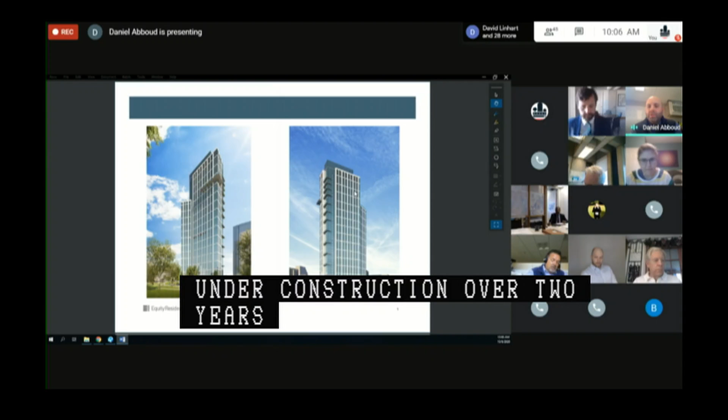This is a project that's been underway, under construction for over 2 years now, and on a 45-story residential building with 470 units over a 5-level parking garage with 769 resident and public parking spaces.

As we mentioned, we previously presented in front of the commission in July for new business, and we now have responses from and are coordinated with all city agencies. We're currently in the superstructure phase of the project, expecting to top out concrete just before Thanksgiving, and are getting a phased occupancy next summer. Work associated with these specific repairs will occur next spring and summer.

Just turn it over to Chris Hodney with Nitsch Engineering to talk more about the pedestrian easement. Thanks, Dan. Share my screen.

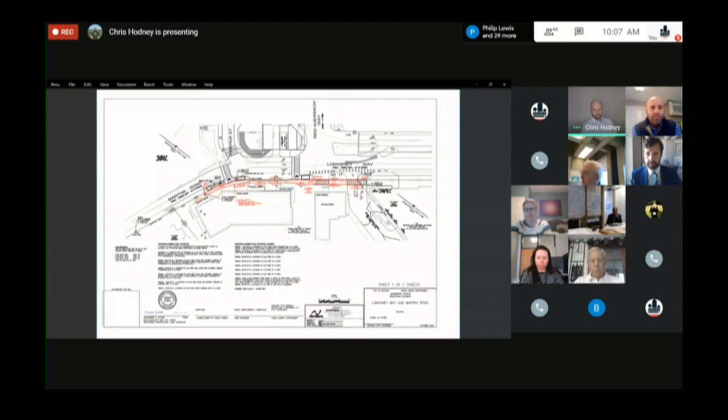All right, so can everyone see the pedestrian easement plan on my screen? We can. All right, great. So this is a pedestrian easement along Lomasney Way and Martha Road in front of the project. Basically, the existing sidewalk and the proposed sidewalk are on private property, and so this pedestrian easement is just to rectify that situation, give the public rights to move over the sidewalk in front of the building. It's approximately 2,482 square feet, and the width varies, from anywhere from 5 foot 9 inches up to about 14 feet - 5 foot 9 on Martha Road and 14 feet on this end by Lomasney Way.

And this is just in support of all the other specific repairs, which are the next item on the agenda. Thanks, Chris. Questions or comments on the pedestrian easement? Todd or Abby? We're all set on this. Members of the public? I don't see any. Okay.

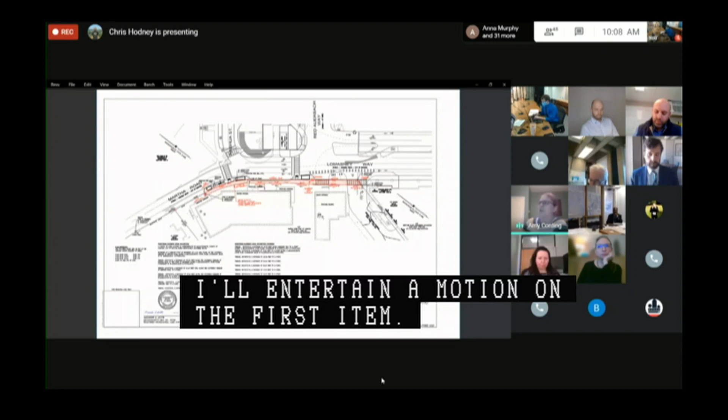I'll entertain a motion on the first item, the pedestrian easement. I'll make a motion on a petition of Charles River Park D Company for the acceptance of a pedestrian easement in Lomasney Way and Martha Road as read into the record by the chair. Second. All in favor? Aye. So moved.

Moving on to our second item on a petition by Charles River Park D Company for the making of specific repairs within the following public ways in Boston proper, consisting of curb realignment, roadway and sidewalk reconstruction, as well as new and relocated pedestrian ramps, specialty pavements, street lighting infrastructure, street trees, planters, landscaping, storm drain infrastructure, street furniture, bike racks, driveway curb cuts, and the removal of traffic islands. The locations are Lomasney Way, generally address number 35, southeast of Martha Road and Nashua Street, Martha Road on its southwesterly side, northwest of Lomasney Way and Nashua Street, Thoreau Path, generally north of William Cardinal O'Connell Way. This was new business on July 23rd, 2020.

Had its first public hearing on August 20th, 2020. Had a public hearing continued on September 3rd, 2020. Another public hearing continued on September 24th, 2020.

This is shown on two sets of plans entitled City of Boston Public Works Department, Engineering Division, Specific Repair Plan, Lomasney Way, Garden Garage, Lomasney Way Improvements, West End, 3 sheets dated June 12th, 2020, as well as City of Boston Public Works Department, Engineering Division, Specific Repairs Plan, Thoreau Path, West End, 2 sheets dated June 2020.

Daniel or Chris, are you presenting on the specific repair plan? I think Robbie. Sorry, oh, Robbie is. Oh, I'm sorry. Yeah, I just launched into it and was muted, so apologize.

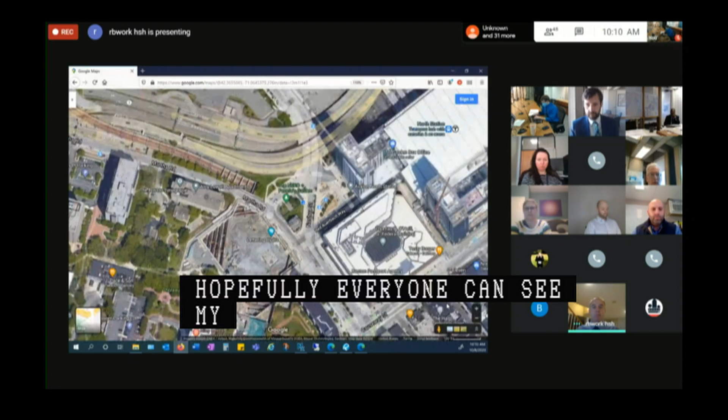Very good. Real quick for context, Charles River, Zakim Bridge over here, North Station, an earlier image of the project prior to foundation or excavation being completed. You can see Martha Road here, Nashua Street here, Nashua Street here, Lomasney Way, and the GSA building here.

I'll start the presentation around the intersection here, and I'll flip over to the specific repair plan now. So this is that point that I just showed on Martha Road in the aerial image, and I'll start in this area and go counterclockwise around the site.

This is our first garage entrance exit with the 700 plus space public private garage that Mr. Abboud referenced. Continuing around the front of the site here, we've got street trees, bicycle racks, benches, street lights, curb ramps, etc. Typical street furnishing.

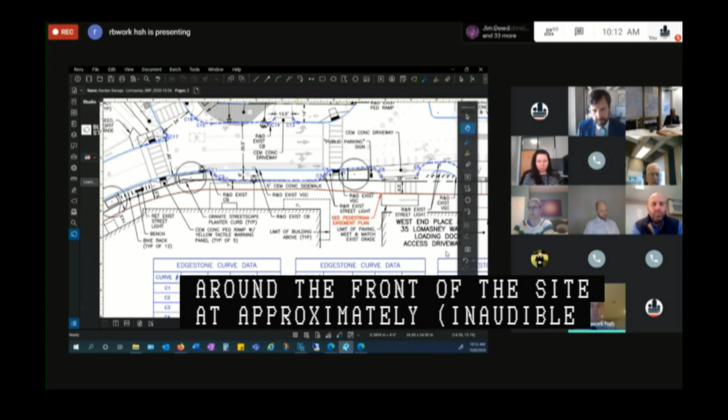And then as we come around the front of the site, we've got approximately 80 feet of pickup drop off here at the front door of the site here, new curb ramps and a new crossing in this area here, as well as new lane markings and a bicycle lane at the intersection.

Continuing towards Causeway Street, we have additional plantings, curb ramps. Our second driveway into the garage.

In this area here, we have extended sidewalks to an unused pavement area and converted into sidewalk space. And we have a modification to the existing access for deliveries to the building and underground parking for the West End place.

Continuing into the intersection, there is an existing asphalt median here that will be removed to create a left turn lane that will separate left turning vehicles into the loading area, as well as the parking garage, from vehicles trying to go through and right.

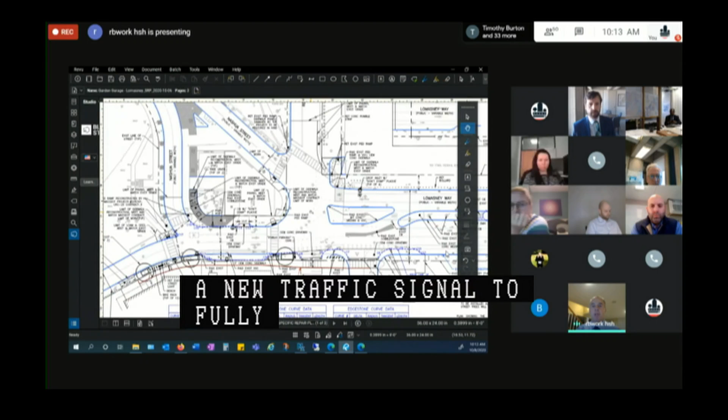Along with this, we will be proposing a new traffic signal at this intersection to fully signalize, organize the vehicle movements, protect pedestrian movements, and facilitate access and egress from the garage.

Earlier meetings with the commission and with various agencies, we had a strain pole and span wire design, and that was changed to a mast arm design. That change was coordinated with BTD Signals Department.

Continuing around the corner of the GSA building, we are closing this existing crossing here that exists today, and we'll be infilling the wheelchair ramp. The crossing is now on this side, which is a bit more attractive and a bit less of a continuous pavement width here.

We are proposing to redo this ramp here and this ramp here. We are proposing not to touch this constructed ramp in this area here that was built as part of the Avalon project a couple of years ago, I believe.

Our limit of work on Nashua Street is this area here. We'll loop around and then meet our other limit of work on the other side here and finish in front of 32 Lomasney Way, this existing building here.

We will be removing the existing cobbles that are here and replacing them with cement concrete sidewalk. We will be replacing existing missing tree grates in this area, which is a coordinated effort with the MassDOT project in this area that has reconstructed some of the wheelchair ramps.

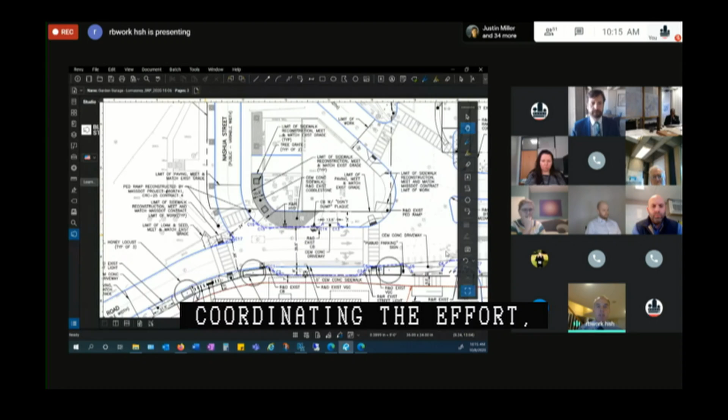We've obtained their design file. We have matched our design to theirs so that ideally we'll have a seamless construction of two projects.

I just want to make sure I didn't miss anything. So the specific repair plan is accompanied by planting details and our hardscape landscape details, so pretty standard. The MassDOT project gave us a detail for their tree grate that they're using so that we will match that precisely. So that is the balance of the specific repair plan in front of the project here.

I'll turn it back over to Sadni and Mitch, who will describe the specific repair plans on behind the project associated with the Thoreau path. And then Mr. Hodney's complete report now, it's up to the commission, we can entertain questions. Any questions by members of the commission on the sections that Robbie just presented before we get to the other portion?

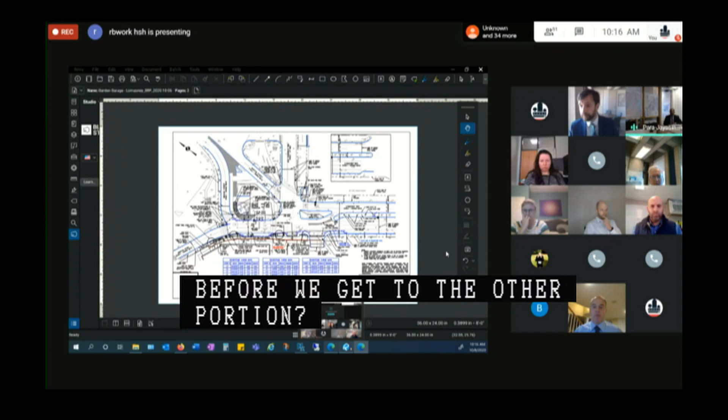Yep. Probably have all BTD comments—has Sven Marson addressed all the BTD comments that have been sent forth to you, to the extent that?

There are some outstanding comments related to pavement markings and signage. The balance are all pavement markings and signage related. We received those a little bit late in the process. We're happy to incorporate them, reviewed them. They're not impactful to the project or to the elements that are part of PIC review and approval. We're asking that we can be approved, assuming we resolve those comments from Mr. Monticelli that are outstanding.

So to be absolutely clear, you are of the opinion that all the comments that still require minor adjustments are not in themselves impacting the PIC plans being shown and recorded right now. Is that correct? That is correct.

Mr. Monticelli asked that we include a standard detail for a bicycle rack on the PIC plans, which is not shown currently. So that would be in addition to what you're seeing today—it would be BTD's standard detail for a lollipop bicycle rack.

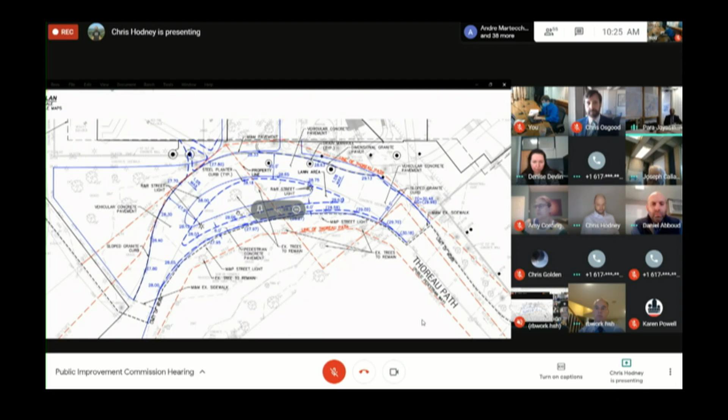Yes, my understanding is that this area is included in the LMI, and I think Dan or Johanna could confirm that. Can someone please confirm that? Because Chief, over the years, there has been much debate as to who is responsible for the maintenance of Thoreau Path, and it has ping-ponged into negotiation. So it will be good for us to know who is responsible for the maintenance of the reconfigured island.

Correct, and we're working through that with Mr. Liu now with the LMI. So we understand there's some shared responsibility there, and the work we're doing is kind of taking precedent. Awesome, Daniel. We truly appreciate if you could execute that maintenance agreement, which will allow us to finalize these plans with the registry. Okay? Thank you, thank you.

Other questions or comments? Todd or Robbie? I think we're all set on this. All right, members of the public? I see none. All right, I'll entertain a motion on this item then.

I make a motion to approve a petition by Charles River Park D Company for specific repairs in the area of Lomasney Way, Martha Road, and Thoreau Path, more particularly read into the record by the chair. Second. All in favor? Aye. Aye. So moved. Thank you. Thank you so much. Thank you very much, Commissioner.

Yes, thank you. Moving on to our third item, a petition by Arlington Boylston Realty Trust for the making of specific repairs in the following public ways in Boston proper, consisting of curb and sidewalk reconstruction, as well as new and relocated pedestrian ramps, specialty pavement, streetlights, street trees, planters, irrigation infrastructure, groundwater recharge infrastructure, bollards, and driveway curb cuts.

So we were here for new business about a month ago when we continued the public hearing 2 weeks ago. This is for the renovations to 350 Boylston Street. In the past 2 weeks, we had a very productive conversation with Boston Public Works regarding the sidewalk design, and I believe at this point we have a design that is compliant with the Boylston Street standards. So I think we're good to go. If you allow me, I'll walk through the drawings.

We're going to replace about 240 feet of sidewalk in front of the 350 Boylston Street building. The sidewalk will be 9.5 feet wide of poured concrete, and then we have a 5-foot wide pervious paver zone. We do have 2 new street trees that will have a street collar around them, so there will be no tree grates, but the pavers will work their way right up to the tree collar around the tree. We also indicate 2 removable round planters near the entrance. When we submit the Mylars, those will either be placed in the pervious paver zone or removed from the drawing entirely. But just so everyone is aware, these are not a permanent condition, they're a temporary condition.

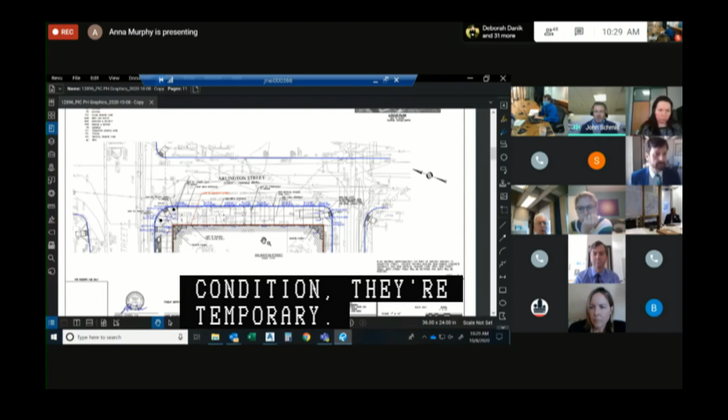On Arlington Street, we have a concrete sidewalk that's 14.9 feet wide. We're constructing new wheelchair ramps on our corner as well as the opposite corners. And if we proceed to Providence Street, we are replacing about 240 feet of concrete sidewalk, and this is where the injection wells will be going. Along Providence Street, we have two entrances - one is for garage and one is for loading docks - and there is a large landing island between the 2 driveways for safe pedestrian egress.

So I'm happy to entertain questions regarding specific repairs, and then we can talk about the recharge wells if you'd like.

Any questions or comments on the specific repairs John just walked through? I appreciate, Barbara, John, everyone's coordination around a design standard for Boylston Street. Thank you for that. Now, do you want to go on to the recharge wells, and then we can see if there's other questions? Thank you.

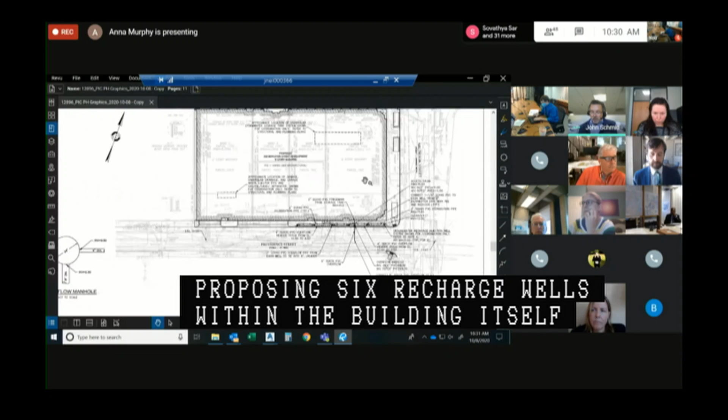So on Providence Street, we are proposing 6 recharge wells. Within the building itself, we will have a storage tank that will capture the required stormwater requirement, meets the stormwater requirement, and then the water will be pumped into these injection wells, and there is an overflow from that into the city's dedicated storm drain.

Thank you so much, John. Questions or comments on the recharge wells or other elements of the specific repair plan?

Oh, hi, John. I was curious where we were on the site plan approval for the groundwater recharge. Yeah, thank you, Denise. We received comments from your office a couple of weeks ago, and we have been pushing staff-wise to revise these plans for today's hearing, and resubmitting the BWSC drawings is on our list for next week. So those drawings will be incorporated into a final submission that will be made to Boston Water and Sewer next week. Okay, great. Thank you, John. Yep.

Other questions or comments on this? Todd, Robbie? We're all set. All right. Any members of the public?

Meg Manzer-Cohen from the Back Bay Association. Good morning, Meg Manzer-Cohen with the Back Bay Association. I just wanted to weigh in support of this project and thank all of you for all the work you've been doing on this, especially my friend Cara, who's been working on Boylston Street with me for so many years. Thanks for everything that you're doing. We're very much looking forward to this project moving forward, and these improvements will be fantastic for pedestrians on a go-forward basis. Thank you so much, Meg. Other questions or comments from members of the public?

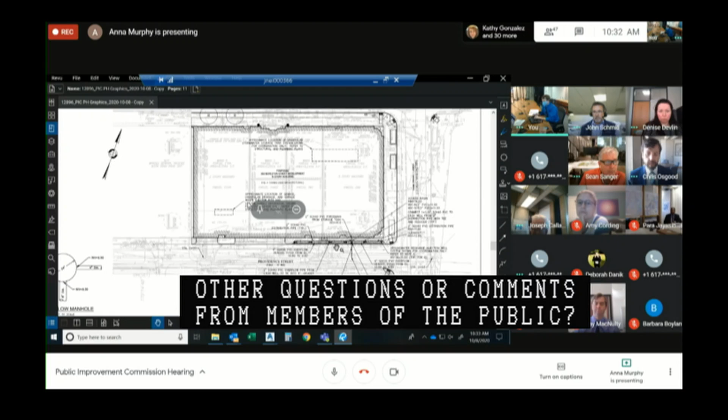I do not see anyone else. John, anything else you want to cover on specific repairs? That covers the specific repairs.

Thank you. All right, I'll entertain a motion on this item. I'll make a motion on a petition by Arlington Boylston Realty Trust for the making of specific repairs in Boylston Street, Arlington Street, and Providence Street as read into the record by the chair. Second.

All in favor? Aye. So moved. Our next item is on a petition by Arlington Boylston Realty Trust for the granting of a projection license for the installation of canopies and awnings over portions of the sidewalks within the following public ways in Boston proper. The locations of Boylston Street on its southerly side at address number 350 west of Arlington Street, and Arlington Street on its westerly side between Boylston Street and Providence Street on its northerly side west of Arlington Street.

This was new business on September 3rd, 2020, had its first public hearing on September 24th, 2020, and this is shown on a set of plans entitled City of Boston Public Works Department, Engineering Division, Canopy License Plan, 350 Boylston Street, Back Bay, 3 sheets dated October 2020.

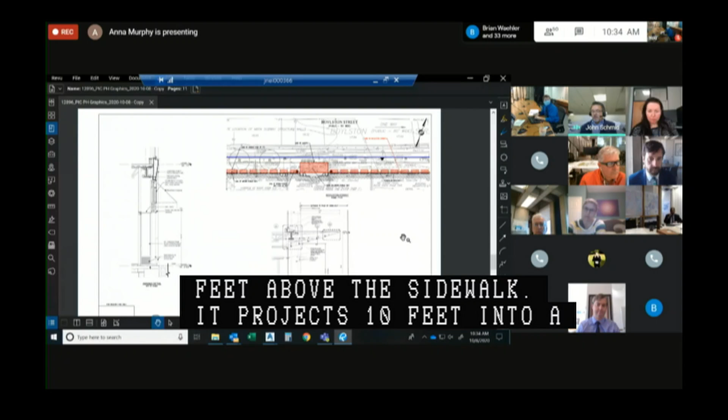Good morning, Commissioners. John Schmid with Nitsch Engineering. Along Boylston Street, we have one large steel and glass canopy that will project at the curb line or near the curb line 16.5 feet above the sidewalk, and at the building 13 and a half feet above the sidewalk. It projects 10 feet into a 15-foot wide sidewalk, so we're under the 65% rule, and it will be internally drained and heat traced.

Then we also have 17 retractable awnings. The first awning on the left side of the drawing is our largest awning, and that is 28 square feet. The remaining 16 awnings are all 20 square feet, and they project 2.9 feet into the sidewalk, again which is 15 feet wide, and they are 10 feet above the sidewalk.

As we turn to Arlington Street, we have the same 20 square foot awnings. We have 10 awnings along Arlington Street, and they project 2.9 feet into a very wide sidewalk, into a 15-foot wide sidewalk, and then they are 10 feet above the sidewalk.

And as we turn to Providence Street, we have the largest canopy, a metal canopy at the most significant entrance along Providence Street. It is 10 feet 9 inches above the sidewalk, and it projects 4.3 feet into a 7.1 foot wide sidewalk, so we're at 60% projection into the public way. It is heat traced and internally drained.

We also have 3 canopies along Providence Street that are similar to the canopies on the other streets, 20 square feet, 10 feet above the sidewalk, 2.9 feet projection into the public way. And that's my presentation. John, thank you for that overview. Questions or comments on the projection licenses?

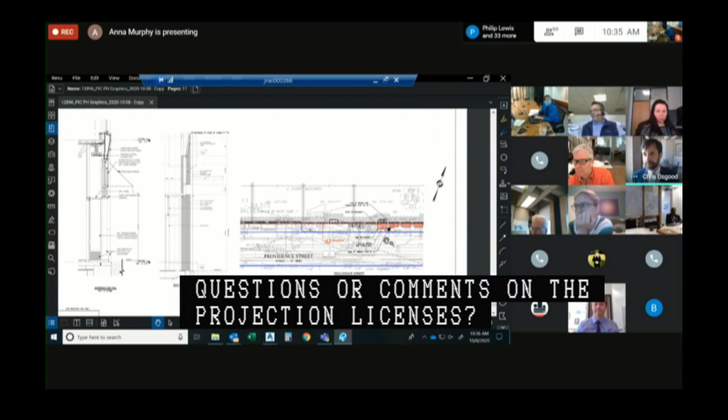Todd, Robbie? Any members of the public? All set. No public. Okay, and just as a reminder, for members of the public who are interested in testifying, feel free to do so either by putting your name in the chat or, if you're visible on the screen, raising your hand.

With that, we'll entertain a motion on this item. I make a motion to approve a petition by Arlington Boylston Realty Trust for a projection license on Boylston Street, Arlington Street, and Providence Street, as more particularly read into the record by the chair. Second. All in favor? Aye. So moved. Thank you, and stay safe, everyone.

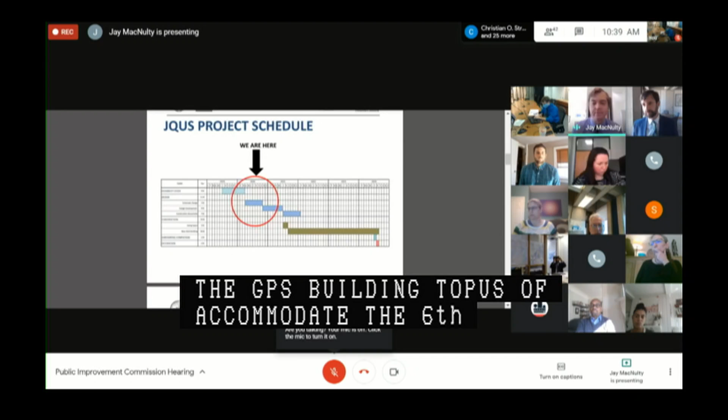Just an overview of where we are with the project schedule. The project team and the School Building Authority have recently submitted the schematic design for review and approval. We expect to begin construction on the JQUS project next summer at the conclusion of this current school year, constructing space in the existing Arlington campus of the JQUS building to accommodate the 6th and 7th graders currently located in concrete modulars on the current project site. We expect the project to continue construction from there and to be ready for operations for BPS by the beginning of the 2024-2025 school year.

So just a quick schedule detail of where we are. As I mentioned, we are working with the MSBA, the Mass School Building Authority, for the project. The MSBA has various different modules that they have us go through. At this time, we have just entered Module 6, which is detailed design or design development.

Some of the activities we're going to be performing during this phase of the project include selection of a CM at risk, putting together a design package for swing space, further development of the design of not only the building but also the streetscape, cost estimating and scheduling. We're also expecting to be held for a vote for approval of a project funding agreement at the Mass School Building Authority board meeting later this month on October 28th.

So at this time, this project currently is estimated to be a $193 million project, and the city is estimating that we will be receiving in the neighborhood of $54 million in reimbursement towards the cost of the project.

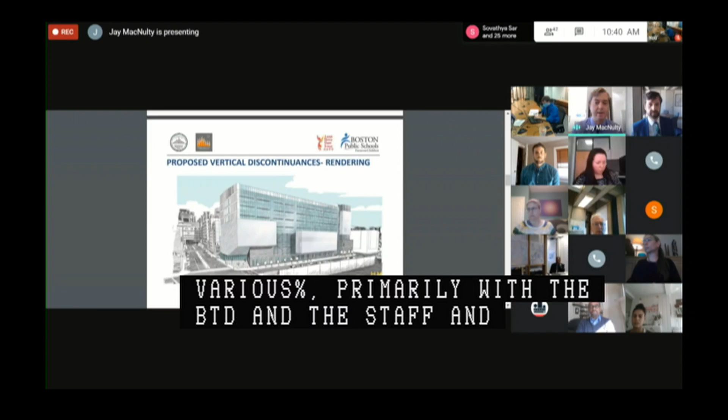So we've been working over the past 6 months or so with various representatives from other city departments, primarily with the BTD representatives. We've had several meetings with Amy Cording and her staff, as well as with William Moose. We also met with the Boston Water and Sewer Commission, Denise Devlin, to talk about our vertical discontinuances. We'll be continuing to work with the various city departments as the project continues along design. But we find ourselves in a position here where we need to request approval from the PIC to approve vertical discontinuances in order to establish ownership and control of the site so that we can execute the project funding agreement with the Mass School Building Authority.

So here we have a rendering of the new building. In front of you, you see the Mass Turnpike as well as Marginal Road. On the left side is Washington Street, and on the right side is Harrison Avenue. In the elevations, you'll see on the west side is the auditorium for the JQUS. On the right side, the projection over the sidewalk is the gymnasium, and above that are 4 stories or 4 floors of classrooms facing south, which will require sun shading. Because this is a relatively small, trapezoidal shaped site, it's very tight, 0 lot line construction. The educational program, working with BPS and others, required for the new JQUS school, requires these overhangs over the sidewalk.

So the next slide is a site plan. Pip, are you able to speak to the site plan, or Josh? Philip, you're on mute. Yes, can people hear me?

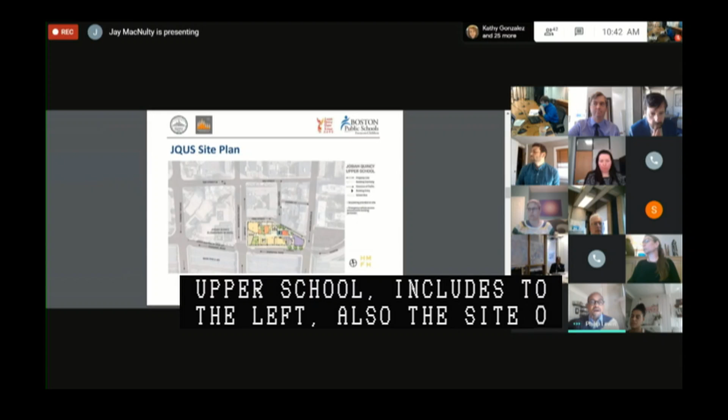Yes. Okay, so this is the site plan of the proposed Quincy Upper School. It includes, to the left, also the site of the Quincy Elementary School, because the 2 schools are associated. You can see that the building fills out the entire site with just a few small exceptions. You can see the unusual trapezoidal shape of the site, as it's bound by Marginal Road and the Turnpike on the south, by Washington Street on the west, and Harrison Avenue on the east. The trapezoidal shape comes from a small street called Pine Street, which goes along the north side of the site.

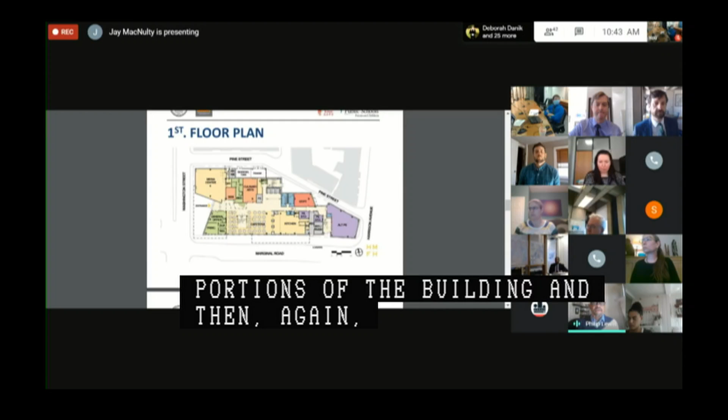There's a few areas on Pine Street because we're very close to adjacent residential buildings. So we're doing what we can to pull some of the mass of the building away from the Pine Street residences and provide a little bit of green space relief, because this new building will be much larger than those residential buildings are at the moment.

When you enter the building off of Washington Street, you enter a lobby space cafeteria that leads you to a major stairway that takes you upstairs to the second floor, where the auditorium and the gymnasium are. These are the two big public spaces for the school. Those are the two spaces that really just fitting the program that was required, us to project out into the street. So it's the second floor projections that we're talking about.

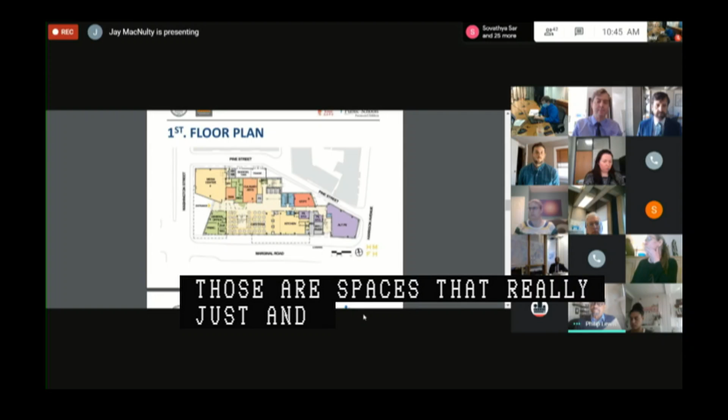One other item I would mention is that at our new business hearing two weeks ago, PIC asked us to clarify our intention with regard to resurfacing the adjacent streets. So just wanted to circle back to everyone on that and let you know that the project's intention is to mill and overlay Pine Street, to reconstruct Marginal Road, and also to mill and overlay the utility entrance locations for the building on Washington and Harrison Avenue. Thank you so much, truly appreciate that.

Second floor, Phil, you want to take this? Yep, this is the second floor plan. This is an important community space for the project. It will become an important building in the Chinatown and South End areas.

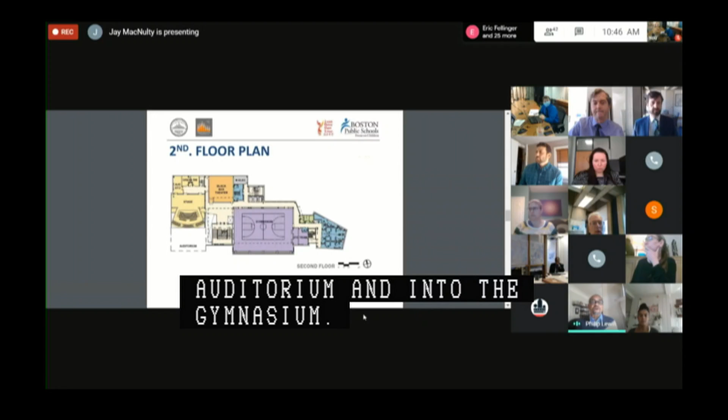Here you can see this major stairway that can lead the public up to the second floor and into the auditorium and into the gymnasium. There's also a small black box theater. You can see perhaps that we're really squeezing to get the gymnasium in, but it doesn't fit within the bounds of the building, so it's projecting about 16 feet into the Marginal Road right of way.

Excellent, yep, and that's a good segue, I think, into the site plan. Josh, you want to run through the next couple of slides? Since vertical discontinuance is the next item on the agenda, can we hit specific repairs first, and then we'll do vertical? Absolutely, yep, sure, sure. Rowan, if you actually want to allow me to share my screen, I can kind of get in a little closer with the specific repairs plan. Okay, no problem, sure.

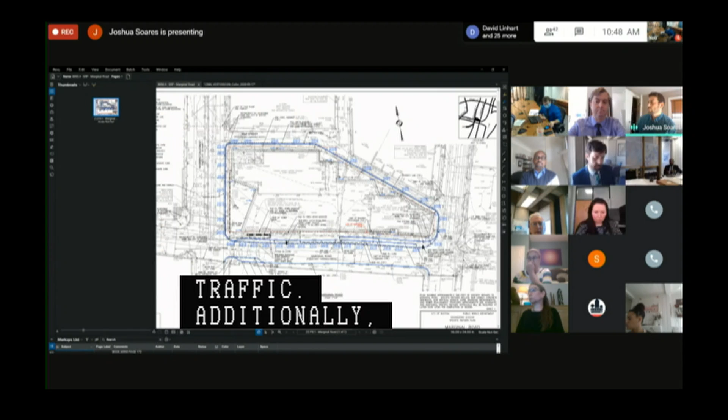Additionally, we have worked with Denise at Boston Water and Sewer to realign the sewer. There were concerns that as we develop the plans further, because as Ron stated, we're kind of in the schematic design phase of the project right now, there would be concerns that ultimately any foundations might impact the existing sanitary sewer here, which consists of a 24-inch sewer main. So as part of the specific repairs plan put forward now, we're going to go ahead and realign the sewer.

Additionally, in response to coordination with Boston Water and Sewer, obviously with the curb realignment and narrowing of Marginal Road, there's the potential to impact the current drainage patterns. Fortunately, there aren't any major impacts, and in setting the bottom curb elevation based on the existing pavement grades, we maintain the existing pattern, and simply we can just provide new drainage inlets over top the existing drainage structures. So there's one here, and then a second structure that would have to be installed over the existing drainage line on the east end of Marginal Road.

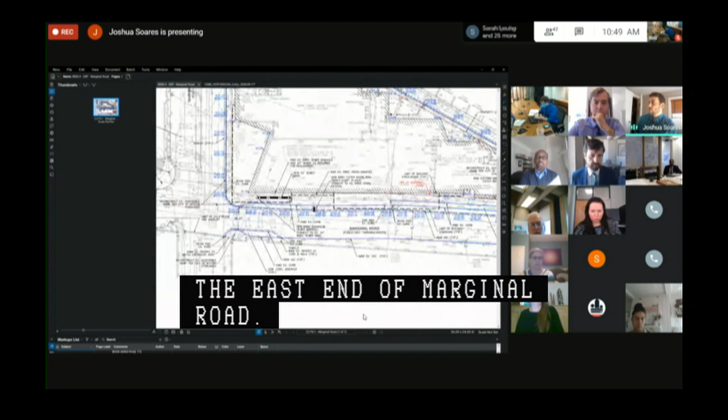Regarding the actual curb realignment, we are proposing to improve the condition at the intersection of Marginal Road and Washington Street with the expansion of the bump out here to allow for a safer and easier pedestrian walking path through here. It gets pretty tight against the retaining wall and around the traffic signals and street lights, so we will be increasing that width.

This reflects the worst case scenario with the proposed realignment. We've had further discussions about narrowing Marginal Road to, I believe, 28 feet, which would increase the separation between the projection and the face of the curb an additional 7 feet, putting it near compliance with the two-thirds width rule.

As Rowan stated, the Facilities Department in Boston Public Schools is committed to improving the surrounding streetscapes, as shown here with the new mill and overlay of Washington Street, Pine Street, portions of Harrison Ave, and Marginal Road. As we further move through the design, we will provide additional streetscape improvements: permeable paver strips, street trees, and additional furnishings.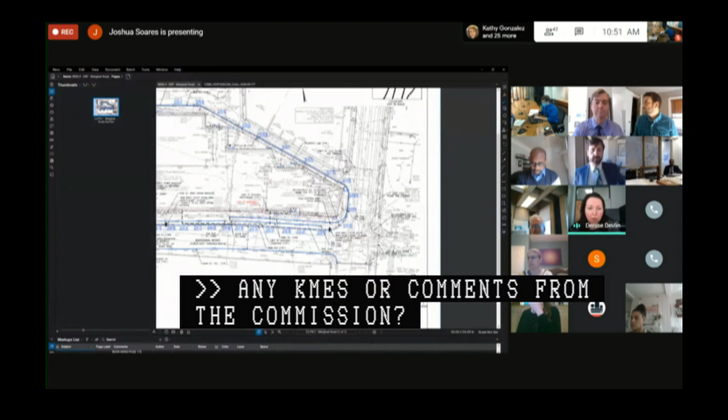On Pine Street, is Pine Street a public way or a private way? Private. Okay. The information that we have shows it as a public way, so we wanted to clarify that. When submitting the final set of plans, we request that you show the limits of the private way versus the public way, just so we can have clarification on that. That would be great. We'll look into that further. Okay, great, thank you.

Are you planning on doing anything on that side on Pine Street through the site plan process at this time? At the moment, and again we're early in the design process, but the intent is to provide an underslab groundwater recharge system, which will ultimately overflow to the Boston Water and Sewer main in Pine Street here. I thought that was public in the street book.

Pine Street is a public way between Harrison Ave and Washington Street. Okay, yep, we'll revise the plans and look into that discrepancy there. Thank you.

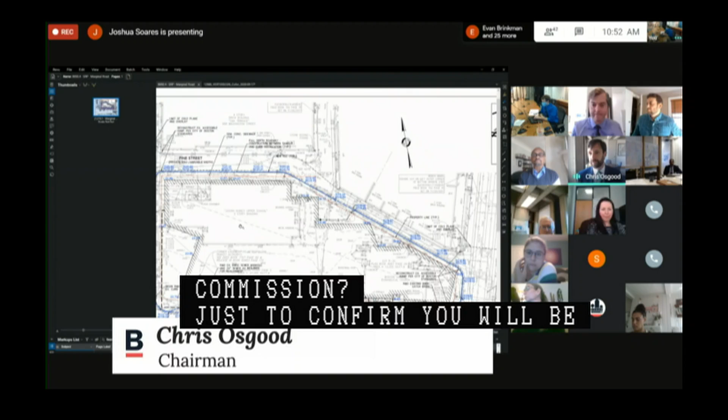Other questions or comments from the commission on this specific repair plan? Just to confirm, you guys will be back with another repair plan specific to the streetscape design, which will account for, in particular, the potential proximity of the overhang to the curb line. Yes, absolutely. This timing is a little bit unusual in the sense that the MSBA requires us to have this process complete at this point in time.

So yes, understand the broader timeline that you guys are working on, I appreciate it. Great, and that's noted on the specific repairs plan that we fully intend to come back to the commission at a later date with the full intended design. Right, the new specific repairs. Yep.

Todd or Rob, any questions or comments on this repair plan? No, we're all set on this. Members of the public? None.

All right, I'll entertain a motion on the specific repair plan. I'll make a motion on a petition by the City of Boston Public Facilities Department for the making of specific repairs within Marginal Road as read into the record by the chair. Second. All in favor? Aye. Aye. So moved.

Our next item is on a petition by the City of Boston Public Facilities Department for the vertical discontinuance of portions of Marginal Road, a public way in Boston proper, located at the side of 900 Washington Street between Harrison Avenue and Washington Street, vertically above the grade of the sidewalk. This was new business on September 24th, 2020, shown on a set of plans entitled City of Boston Public Works Department, Engineering Division, Vertical Discontinuance, Marginal Road, 900 Washington Street and 249 Harrison Avenue, Boston proper, 2 sheets dated September 2020.

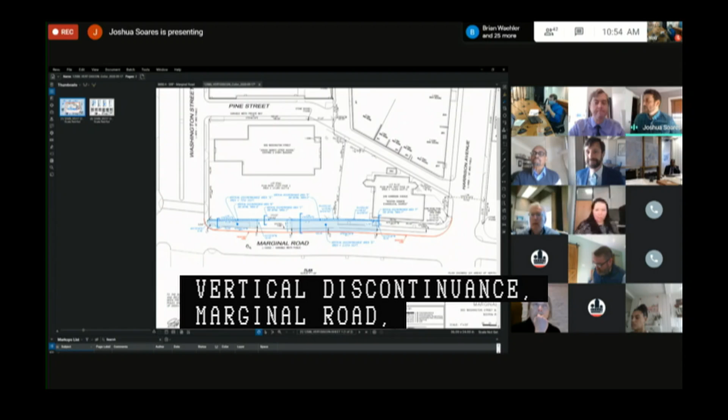Good morning everyone, Josh Soares is still here. I'll get right into the vertical discontinuance that was just previously discussed. The two main areas include the vertical discontinuance associated with the auditorium, and then the larger area associated with the gymnasium. Along the full southern face of the building will include the sunshades due to the southern exposure.

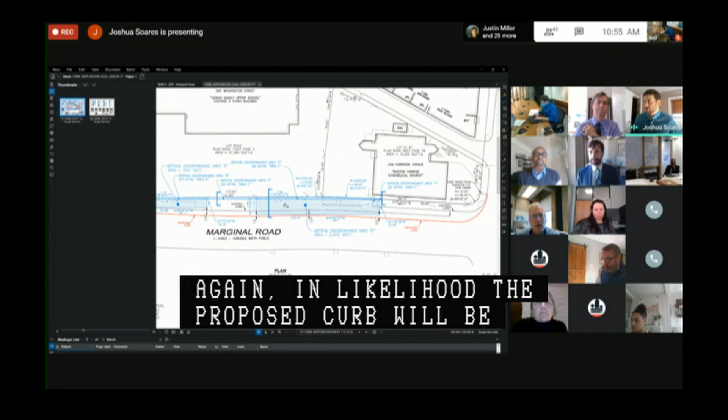Vertical discontinuance area A with the auditorium extends approximately 10 feet into the right-of-way, leaving approximately 7.8 feet between the face of that and the proposed edge of the curb. The larger discontinuance area associated with the gymnasium extends approximately 17 feet into the right-of-way, leaving as little as approximately 0.6 feet between the edge of that and the base of the curb. Again, it's to be noted that this proposed curb will likely be further realigned to narrow Marginal Road and provide that additional 7 feet of clearance between the edge of the overhang and the face of the curb.

The vertical discontinuance area A is approximately 22 feet above the finished grade and is approximately 23 feet high, whereas the gymnasium overhang is approximately 17 feet above grade and 26 feet high. You can see these in cross-sectional view on the following sheet.

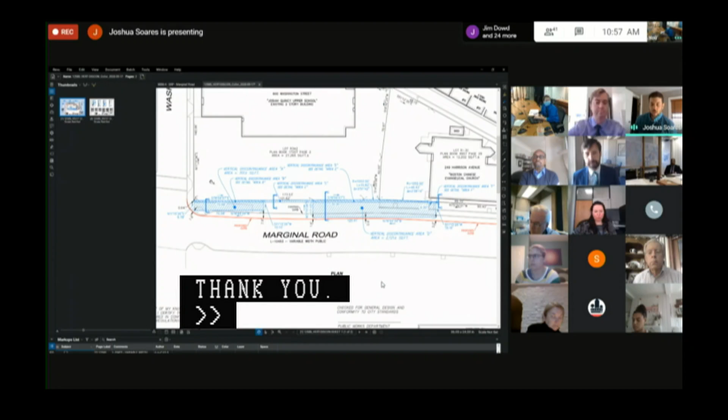Okay, thank you John. To reiterate, Chief Osgood, the auditorium will be approximately 22 feet above the grade of the sidewalk, and the gymnasium will be about 17 feet above the finished grade. I apologize, thank you for that clarification.

Absolutely exciting project. Public Works, and not just Public Works, all the city departments, we will do all that we need to do to help you achieve the end goal here, including any interactions which you may have or need to have with utility companies to support your project when you need it to be supported. Our PIC staff and my team can help you in that outreach if such outreach is needed.

So much appreciated. Yes, and I would also say that Todd and Amy and others at BTD have been extremely helpful thus far on the project. So thank you very much for that. You have our support.

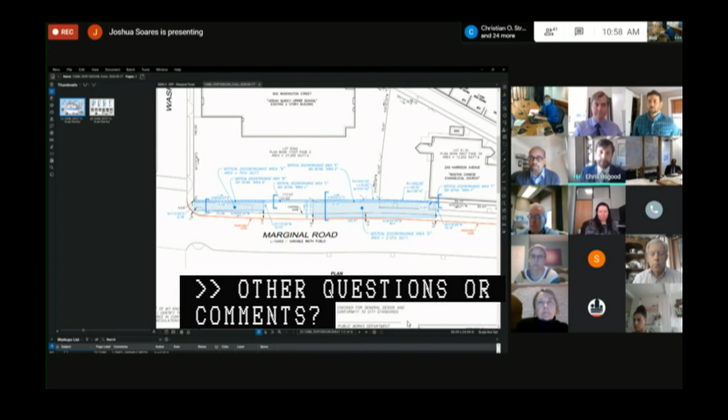Other questions or comments? Todd or Rob? I think we're all set with this. All right, members of the public? I see none. Okay, I'll entertain a motion on this item.

I'll make a motion to approve a petition by the City of Boston Public Facilities Department for the vertical discontinuance of portions of Marginal Road, as more particularly read into the record by the chair. Second. All in favor? Aye. Aye. So moved. Thank you guys so much. Thank you, great project. Thank you. We look forward to continuing to work with you.

Thank you. Our next item is on a petition by One Channel Center Ground Lease Lessee LLC for the making of specific repairs within Medallion Avenue, a public way in South Boston, located at the side of 1 Iron Street between Richards Street and Iron Street, consisting of new emergency flood barrier infrastructure. This was new business on September 24th, 2020. This is shown on a set of plans entitled City of Boston Public Works Department, Engineering Division, Specific Repair Plan, 1 Iron Street, Temporary Flood Barriers, Boston, 2 sheets dated July 2020.

Thank you and good morning, Commission. My name is Justin Miller with Tishman Speyer.

Justin, before you start, can I just ask, do you see the PowerPoint? I don't think it's up yet. We don't, not yet. Can I share here? Please do. It's not letting me, huh. This is Andre Martechini. Yep. Todd, can you see if, I don't know, is the present now feature showing for you?

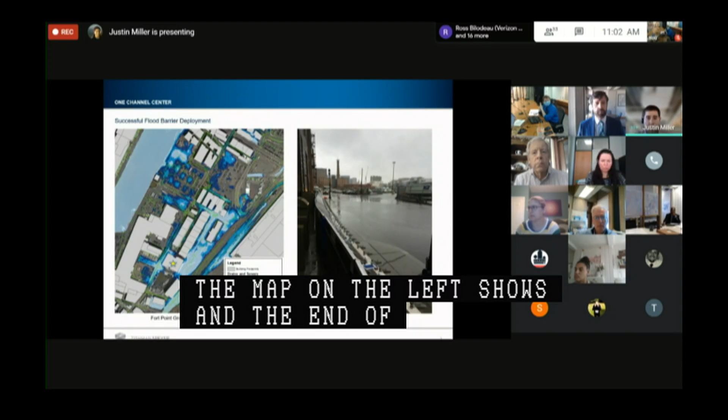To paint a picture, One Channel Center is located down the A Street corridor towards the southern end of the Channel Center Association near the West Broadway Red Line stop in the Seaport of Boston. It happens to be located in a particular area of the Seaport that is particularly susceptible to rising water and potential flood damage, as the map on the left shows. So when we purchased the property at the end of 2015, we also purchased and installed a deployable flood barrier system to protect against instances of raised water levels due to storm surges. On the right, you can see an example of that from March 2018 when there was a successful deployment.

Unfortunately, this particular system we deployed does not correspond with the 4-foot clearance along the sidewalk required by the city's Disabilities Commission. So we have since been working with Todd, Amy, and Sarah from the PIC and Disabilities Commission respectively to plan the procurement of a different flood barrier system that corresponds with that guideline.

Our colleagues at Kleinfelder have helped source an alternative system, which we've since presented, that can wrap around our loading dock gates and hardscape planters along that sidewalk to respect the 4-foot guideline and still provide the amount of protection we need to prevent water from getting into our loading dock and damaging the infrastructure of the building. So with that background stated, I'll now hand it over to Andre to go through the actual plan for the anchors in the flood barrier system.

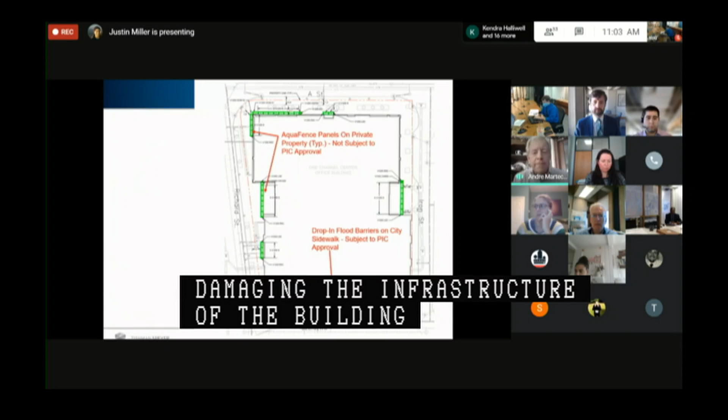Great, thank you Justin. Again, Andre Martechini from Kleinfelder. The subject of this public hearing is actually the drop-in flood barrier system down along the bottom of this drawing along Medallion Avenue. The green barriers up on the upper part of the drawing are the Aquafence panels that were previously purchased, and they are all situated on private property — we do not impact, we have sufficient room for people to pass by there. So the subject of this is the Medallion Avenue drop-in panel system.

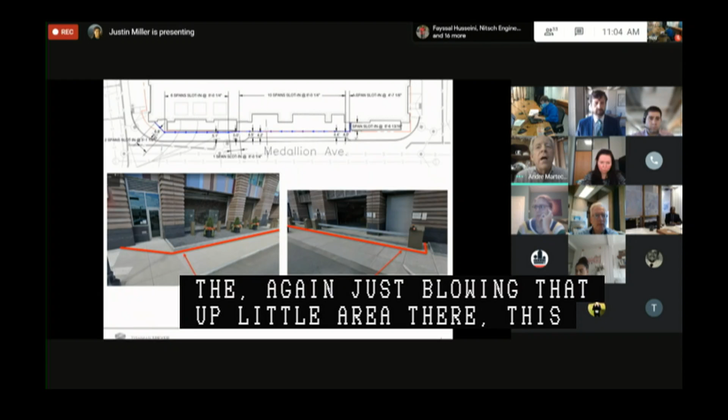So just blowing up that little area there — this is a panel system that's very narrow, and basically it'll be hugging there's a little planter along the sidewalk, and some of the little barriers that stop the loading dock area, so it'll be just hugging there. The minimum clearance we maintain is at least 4 feet from any object, so that's achieving the aim of this. It is a deployable system, so the picture on the left is an example of what it will look like.

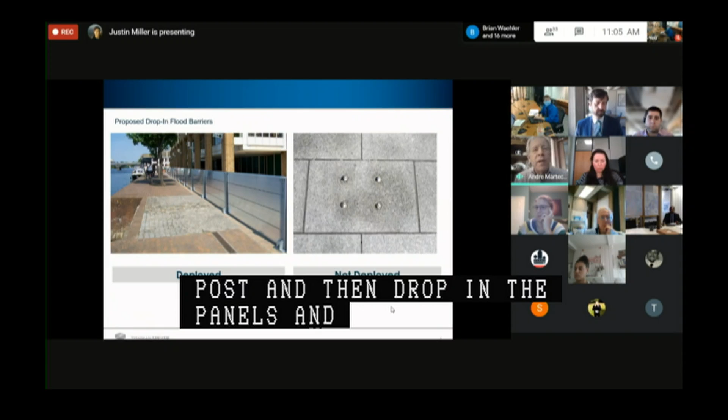The posts, when you need to deploy in advance of a storm, get bolted down to inserts that are left in the sidewalk. They'll be drilled and grouted into the sidewalk, and you erect the post, then drop in the panels, and there's a screw mechanism that pushes the panels down to make sure they seal, so all the gaskets are well sealed. When it's not deployed, there'll be four what we call blanking bolts inserted into the threads so they don't get crudded up with stuff, protecting the threads. The bolts are flush to the sidewalk, so they will not be projecting above it — no tripping hazard or issues with snow plowing.

From a structural point of view, at each one of those posts there are four bolts in plan view, and they're basically drilled into the sidewalk, which varies between 6 to 10 inches in thickness in this area.

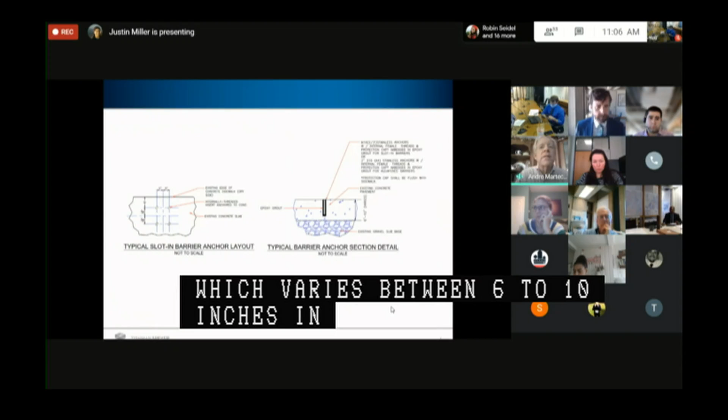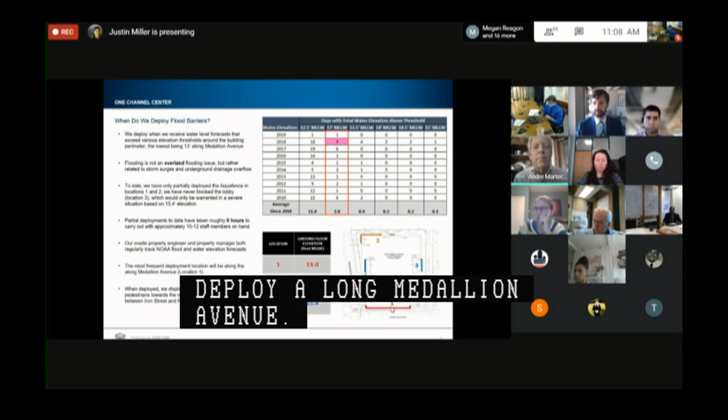So the idea is that under the flood operations plan, which we'll talk about in a minute, when a storm is coming, we don't necessarily have to deploy everything. It'll be dependent on what the predicted storm flood elevation is. So if we're only predicting somewhere close to the 13 number, we'll probably only deploy along Medallion Avenue. If it gets a little higher, you'll go to Medallion and A Street, and if it's really a big storm, then all of them will be deployed.

There was a question: how many times do you envision this happening? 2018 was kind of a banner year for flooding, and we would have hit elevation 13. In other words, we would have had to deploy along or get close to elevation 13 about 7 times. But on average, over the last 10 years, it was 2.8 times. So say 3 times a year, we might have deployed along Medallion.

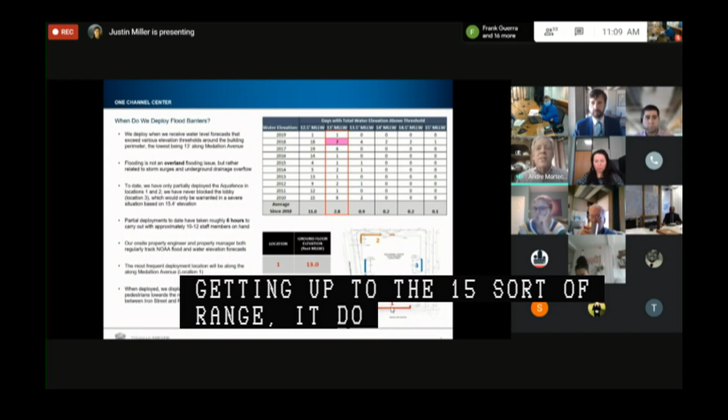Similarly, at elevation 13.5, it would be less than once a year on average that we would have deployed at both 1 and 2. And to get up to the 15 range, it doesn't happen very often - it happened once in 2018. So it's not a frequent occurrence that we're dealing with here.

Just what we wanted to communicate is the reason we're doing this is at these threshold levels, when water enters above those threshold levels, it impacts a lot of things. For instance, a lot of life safety systems, generators, the transformers from Eversource - 3 of them are down by the loading dock area. There's some electrical closets that can potentially get flooded, and so on. So there's a lot of pretty important equipment that, if subject to damage, could cause the building to shut down for anywhere from a short period, but depending on how much equipment gets damaged, it could actually be a longer period depending on the availability of parts.

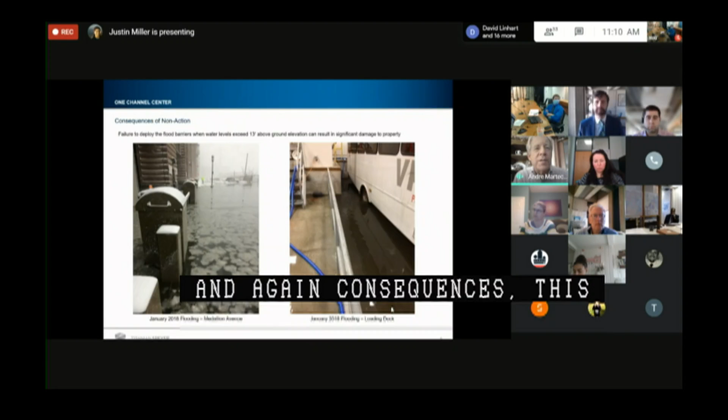Next, and again, consequences - this happened. This picture, both of these pictures, occurred in January of 2018, before they had the barriers to actually deploy. This was along Medallion Ave, and this is now the flood of record - the highest flood we've ever experienced. In March, we experienced the 3rd highest after the blizzard of '78. So two of our most recent high record floods were in 2018.

So it's a reality that the building is trying to protect against.

Next. So at our meeting last 2 weeks ago at the new business meeting, we talked about submitting a flood operations plan. We did that, and it has been reviewed and approved by the Boston Fire Department. And so, without getting into a lot of details about the plan, it basically describes some roles and responsibilities - in other words, who makes the calls, the activation triggers.

These are the different elevations of flooding that can activate areas 1, 2, or 3. It lists all the equipment and supplies required, and it goes through the actual actions that have to happen before you deploy, when you deploy, before you remove, and post removal - in other words, some documentation requirements. It also talks a little bit about the access, egress, and evacuation, depending on partial or full deployment.

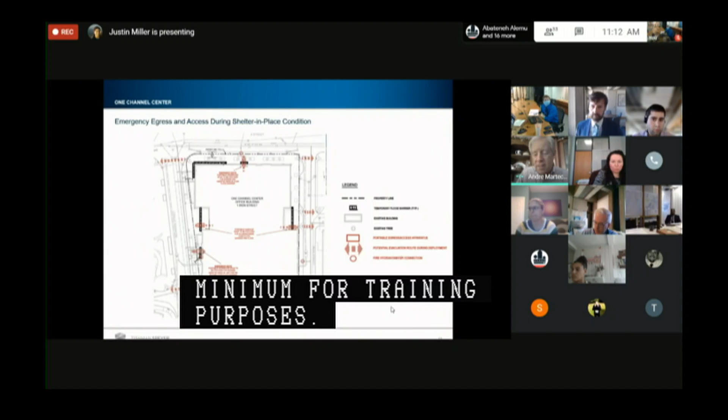And let's see, the last one. I can pick this up if you'd like, Andre. Sure. So just to add a minor bit of context to the evacuation plan, in addition to making sure

that it corresponds with all of the requirements and received approval from the required city agencies, it's also corresponding to our emergency egress plan, which we worked on in conjunction with our tenant in the building, State Street Bank. This is how it relates to that plan.

Where if there were an emergency that would require evacuation of the building, there are different points of egress where one panel in the flood barrier system would be temporarily folded down. Temporary ADA ramps could be placed over those so that we could make sure everyone is safely out of the building. And then once the flood barrier is fully erected, in the event that emergency crews need to traverse during a storm, in a worst case scenario where we're flooding and there's an emergency evacuation that requires emergency crews to go back in, they can cross by way of an A-frame ladder.

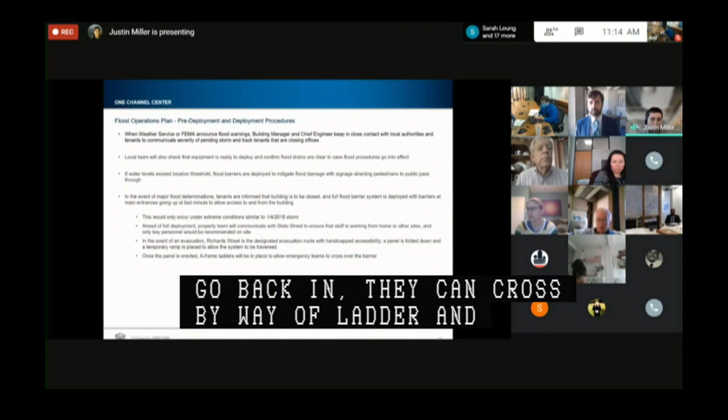And again, tying back to our flood operations plan, this is the trigger portion of it for when we would look to deploy the flood barriers, when we have our property management team tracking Weather Service and FEMA reports. The building manager, Kathy, and our chief engineer would contact local authorities and communicate with the tenant to make sure everyone's aware of the severity of the storm.

The property management team will also make sure that the equipment is ready to deploy, and if the water levels exceed the thresholds, the flood barriers will be deployed.

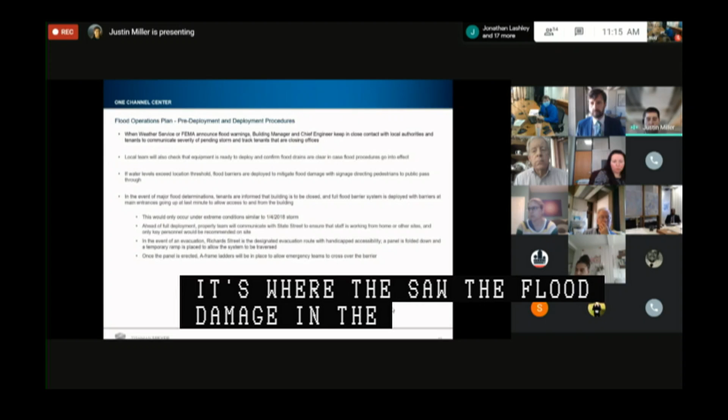We have only experienced one event with such extreme conditions where the property needed to be closed because water levels were rising to the point where all entrances to the property needed flood barrier deployment. This was before we had the aquafence, so it's the instance where you saw the flood damage in the garage. But to state simply, we'll continue to correspond with both our tenant and local authorities to make sure everyone is kept safe in such an event.

We're now happy to answer any questions. Andre and Justin, I appreciate the modifications to ensure accessibility and the thoughtfulness that went into the operational plan as well. You mentioned that the fire department has reviewed this. Do you know if the Office of Emergency Management has connected back with you, Ben McNeil or Chief Shu Benford?

I haven't seen that correspondence. I don't know, Andre, if you've received anything offline, but I assume that's not the case. Robin, I don't know.

Okay, we are happy to check with them. We're looking to make sure there's coordination both across fire - and we appreciate all of your coordination with them - as well as our Office of Emergency Management. Other questions or comments on the design?

Chief, just a point of clarification. Mr. Miller and your team, the Public Improvement Commission is in no way passing judgment or comment as to your operations plan, the triggering mechanism, or how you manage the situation. You are seeking the permission of the Public Improvement Commission to deploy the elements and the changes to the surface. How you use that is not to be guided or influenced by the Public Improvement Commission.

Very well said, that's right. Other questions or comments? Todd or Abby?

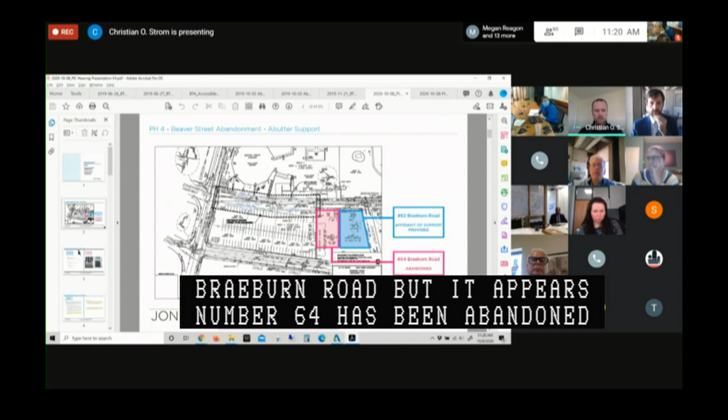One was a letter of support from the neighbors located to the north along Braeburn Road. We did receive one affidavit of support from number 62 Braeburn Road, but it appears that number 64 Braeburn Road has been abandoned, so there's really nobody to get in touch with there. I have a follow-up slide here showing this letter of support from the abutter as well as the abandoned property.

Great. Christian, if you can just provide documentation - and Todd, I defer to you on whether this is needed - showing the letter you sent to 64, the outreach you did to them, that would be great. Yes, I'll absolutely follow up with that.

Furthermore, I wanted to point to a few things from our title opinion. One thing here is from the release deed, 62 and 64 Braeburn Road. These releases would eliminate any potential claims of easement rights in the direction of Gordon Street. So I think that's clearly spelled out.

I'm sorry, my daughter is trying to get on a Zoom call for her school.

So this speaks further to that. Moving on, our legal counsel found no evidence that the locus portion of Beaver Street was ever subject to a taking for purposes as a public way. So I think this supports our finding that this is indeed a private road and there shouldn't be any public claims to use of this road.

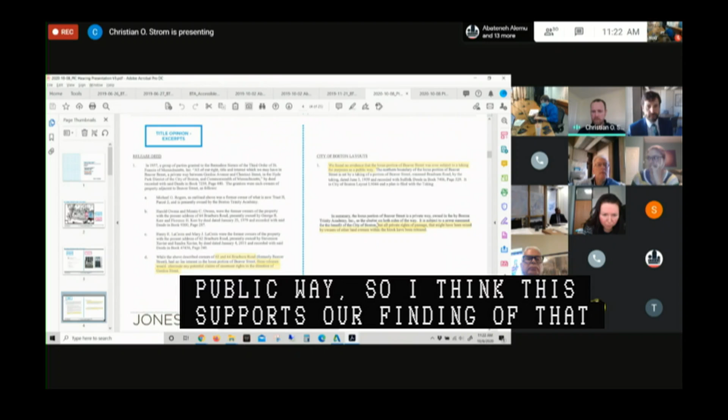And finally, in summary, all private rights of passage that might have been raised by owners of other landowners within the block have been released. So we feel that the title opinion clearly shows that this street is within Boston Trinity Academy's private right.

The next item I was requested to look into further was easements along Beaver Street. There is only one easement, and that is the sewer easement, which was granted in 1907. We're not disputing this - it's right here. This is the plot plan from 1907, and this little pink line shows it.

And then I also have our actual abandonment plan, if I could get to it - just noting the easement there and highlighting the area that we want to abandon. Sorry, I'm used to using Bluebeam. So there are no other utility easements on this property, it's only the sewer easement.

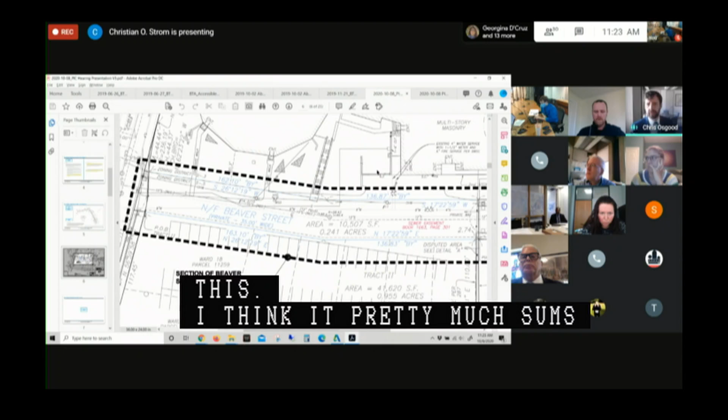And I think that pretty much sums up what I have for the street abandonment petition. Thank you, Christian. Denise, any thoughts or comments on the sewer easement? We actually did send Christian a response about our easements, and what we did say was we did want to maintain our easements because we have public facilities that need to be maintained in order to serve the customers outside the limit of work and the proposed abandonment.

And actually, I do want to double check - I don't know if we had overlooked the water in here. I believe that is public, and as Christian stated, it looks like it's just the sewer easement that we own. The easement only includes the sewer and not the water. Okay. But I believe on the site plan, you were proposing to do some abandonments of the water.

I'm sorry, can you please excuse me for 1 minute, 30 seconds? No problem, we all very much understand.

Denise, PJ here. If there's any semblance of public water being utilized through that easement, we need to make sure the abandonment plan has a qualifier saying that in the future no one can build on top of it, through it, or underneath it, and that your easement is protected. The abandonment plan must not neutralize or compromise the sewer or water easement for the next 5,000 years, or 500, for the future.

I'm sorry, I had to step away. I'm in the middle of getting my 6-year-old in class. Christian, you very much don't need to apologize for that.

The item before us - I'm sorry, I missed a few things there. Just going back, Denise was requesting that we show the water easement as well in our plan. But I missed what PJ said.

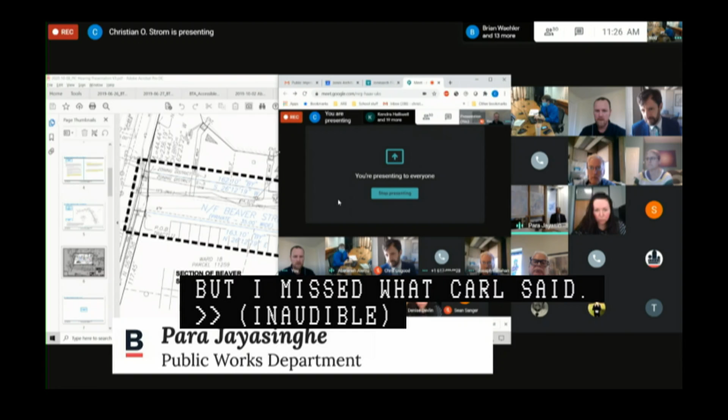Christian, in a nutshell, the sewer easement, especially when Boston gobbled up neighboring cities including the town of Hyde Park, these easements are there for public purposes, not just for the immediate abutters. I'm having a hard time understanding. I'm sorry, I think it's breaking up on your end. Let me speak slowly: you need to ensure those easements are not compromised from here to eternity, even though the right of way is being abandoned. The easements need to continue, and that language must be included in the recording of the abandonment. So let's assume 100 years later, or 10 years later, you cannot build a structure above the sewer easements, okay?

Because I promise you, 10 years from now, people won't record this, and when someone does the title search, as you have thoroughly done, the abandonment plan cannot override the easement the Water and Sewer Commission is trying to retain. Yes, understood. And that's also one of the reasons we never planned any building over the easement.

But how do I best record this? You should add a note to the abandonment plan, and we will also add a note to the PIC order, and both of those documents will be recorded. That should, as long as Denise and the Water and Sewer Commission are okay with that, sufficiently note the retention of this easement.

Great, well, we can make this action contingent upon that final sign off from Water and Sewer and the appropriate annotation around the easement rights. Okay, thank you.

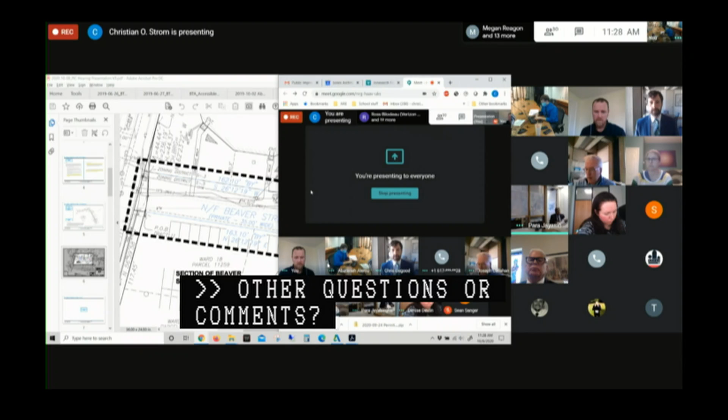Other questions or comments? Todd, Robbie? We're all set as long as those notes are added to this plan. Great. Any members of the public? I see none. All right, I'll entertain a motion on this item, again contingent upon final sign off from Boston Water and Sewer and the inclusion of appropriate notation around the easement rights.

I'll entertain a motion on this item again, contingent upon final sign off from Boston Water and Sewer and the inclusion of appropriate notation around the easement rights in the amendment. I make a motion to approve a petition by Boston Trinity Academy for the abandonment of rights to travel on Beaver Street, as more particularly read into the record by the chair, subject to retention of the water and sewer easements and contingent upon sign off by Boston Water and Sewer Commission. Second. All in favor? Aye. So moved. Thank you so much.

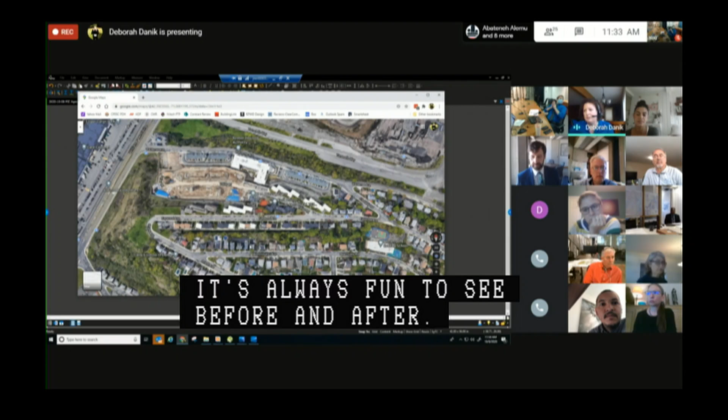This project is located in East Boston in the Orient Heights section. It's a Boston Housing Authority property, which is really large and actually bisected by 2 public ways, bounded by Waldemar Avenue on the north and Faywood Avenue on the south, with Vallar Road going through the middle. Phase 1 of this project was constructed and completed, and you can see it along Waldemar Avenue. There were existing Z-shaped buildings along Waldemar Avenue that were demolished and replaced with townhouse buildings, and then a mid-rise building. This is phase 1 completed.

This Google Earth view is now showing the phase 2 construction, which at this point is fully completed. So Vallar Road, with the widening and extension, and then the modifications to the roundabout, have been fully constructed to this point. We've also received approval to do the second half of Vallar Road; we just have not constructed that yet. So our requests today are for the improvements for the last portion, the 3rd phase of this project, along Faywood Avenue.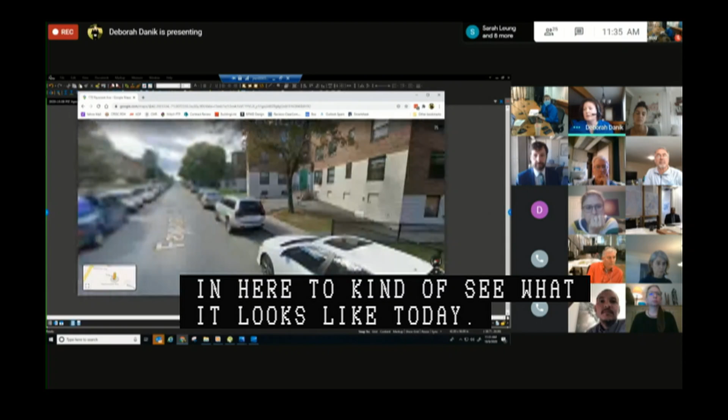I want to just get you down in here to kind of see what it looks like today. Faywood Avenue right now is a one-way road — sorry for those of you that may get motion sickness — going uphill, currently with parking on both sides, and both of the existing sidewalks on either side are about 5-foot cement concrete width.

The phase 2 work that we have completed, I wanted to show you where we're going with the proposed work. Those existing sidewalks are 5 feet wide. We're proposing on the north side of Faywood — let me get this plan out for you. Looking to the left, uphill, the north side of Faywood Avenue, we're proposing to widen the existing sidewalk in order to install street trees and give a clear 5-foot wide pedestrian walkway.

On the south side of Faywood, we're actually going to maintain the existing sidewalk width that exists due to existing cheek walls along the back of sidewalk. In order to maintain the existing roadway width, we have coordinated this with BTD. We did a couple of different studies of Faywood to see if it made sense to widen it to make it 2-way. Not only the technical details of that, but also talking to the neighborhood, maintaining this one-way road makes sense, and so we're moving forward with that.

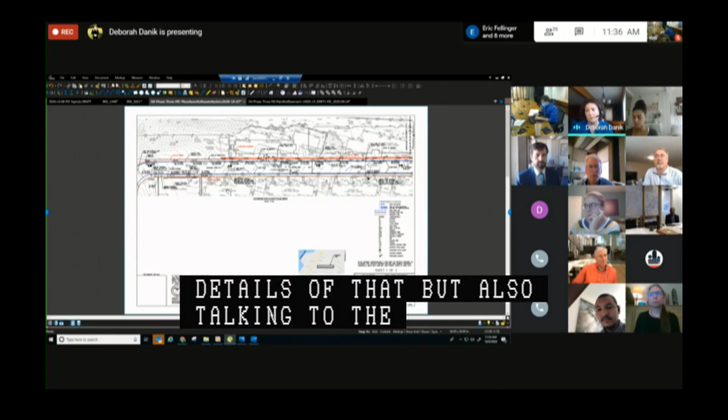As I started saying earlier, the proposal before you is to modify the north side of the sidewalk to widen it in order to install street trees. We'd also be requesting a pedestrian easement to make the widening possible. On the south side, we would be replacing the sidewalk in kind and making all those improvements ADA compliant, as well as repaving the roadway and putting a new top on it.

I had these images to give you a feel of what it would look like on the north side of the sidewalk with the street trees, since it's the same installation we just put in on Vallar Road. Here is one of the townhome buildings, and this is the mid-rise building. As you're walking adjacent on the sidewalk toward the mid-rise building, this is what it feels like with the street trees and plantings.

The townhomes feel very different because they have individual entrances for people, but we still have the 3-foot wide tree pit and the 5-foot wide sidewalk. The only other specific detail is that we're maintaining the existing curb in place, so the tree pits will vary a little bit — they may be 3.1 feet wide — but we're maintaining the 5-foot wide clear sidewalk. It felt visually like keeping the sidewalk the same width would work better than having it meander in and out so the street trees stayed the same width.

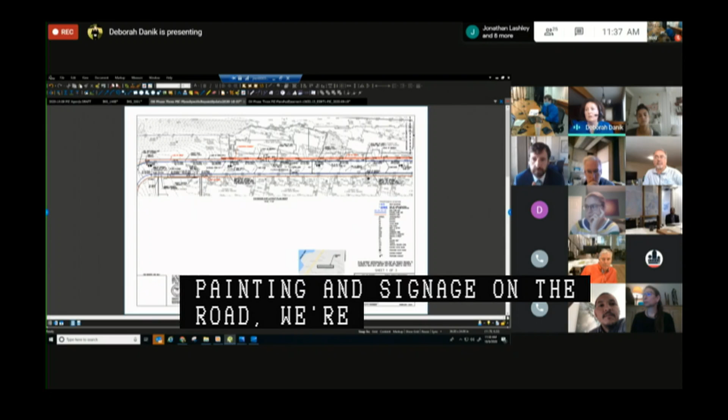The other thing we're coordinating is some painting and signage on the road. We're adding sharrows for bike lanes and replacing some signage. There is an existing accessible parking area on the south side of Faywood Avenue. We're proposing to move those existing accessible parking spaces with signage to the north side, because the accessible living units will be in this mid-rise building.

One other detail you'll notice on this plan: there's an existing, not official, parking lot — a paved area with a driveway for trash collection. We're proposing to relocate the existing driveway entrance further up the hill, because it works better for making this a more usable parking lot, and the trash collection will be off the public way.

The other thing we already had approved during the Vallar Road widening and alignment process in 2018 was that existing Vallar Road diagonals into Faywood, so we're teeing that off. Included in the Faywood improvements are the pedestrian crossings and accessible ramps required to make this crossing straighten out, so pedestrians can get across and through it.

I think those are the specifics. If you have any specific questions about the design or some of the improvements, I'd be glad to help answer those.

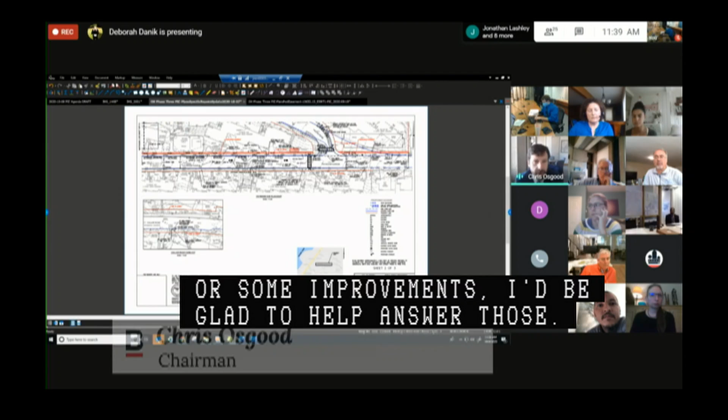This is a minor one, coordination that's already happened, but between now and the public hearing, maybe Todd can connect with Brian Coughlin, our superintendent of waste reduction, just to make sure the access point for trash and recycling is one that we think will work. I'll let you know this trash is picked up by a private company, not by the city.

As long as you feel like it will work, then that's fine. Great, thank you. Other questions or comments?

Debra, a couple of quick questions. What is the right-of-way width of Faywood today? The right-of-way available between the two curbs is 28 feet. My question is what is the right-of-way of Faywood Avenue — is it a 100-foot street, 40-foot street, 39.6? What is the right-of-way width?

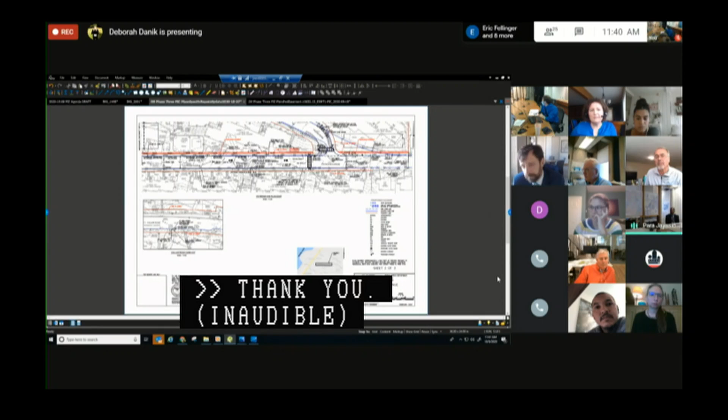40 feet. Thank you. So all BHA streets, Debra, because parking was a premium 50 years ago — that's why you've got two 5-foot sidewalks on a 40-foot street, leaving enough room for parking on either side. There's a method to the madness as to why it's laid out with two 5-foot sidewalks and not two 7-foot sidewalks. So now you're increasing the sidewalk width on one side from 5 to 7, correct?

We're increasing it from 5 to 8. Okay, 8. But still within the 40-foot right-of-way, yes? In order to facilitate the 8-foot wide sidewalk, we need to be afforded a pedestrian easement, so we're asking for a 3-foot wide pedestrian easement on the north side. Okay, so you're jacking it up from 40 to 43 to allow the 3 feet. So you will still have 30 feet of pavement to facilitate 2 parking lanes, correct?

There's 28 feet of pavement, but correct — we are not moving the curb line. In order to expand the sidewalk, we're expanding into the private site. All right, thank you, Debra. You're welcome.

Essentially, it's an extension of an already recorded pedestrian easement for 2451 Washington. We came to the city a couple of years back for the start of construction, and this is essentially an extension of that. It's roughly 8 feet in length, and we're maintaining that 5 feet width required by the city.

I think that was probably one of the more important comments we received from city folks: to show and note that we are maintaining that 5 feet width. The project is currently in construction, and we are trying to reach substantial completion hopefully later this month. The project is sponsored by the city, and has 16 units, 9 market rate and 7 affordable. We were just hoping to submit this pedestrian easement so that it captures the full boundary of the site.

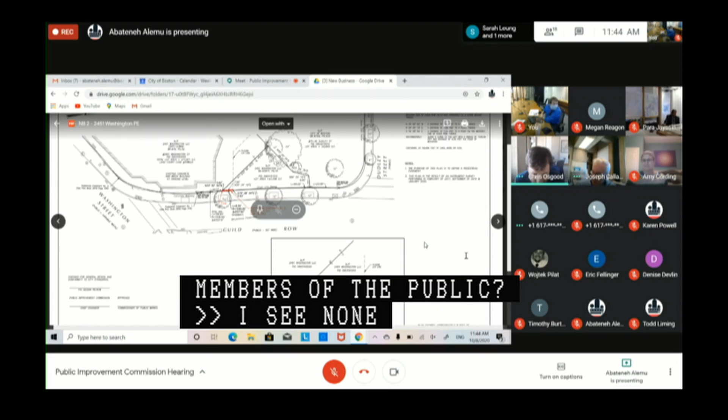The total square footage of it is 8 feet? 8 feet, or less than that actually - 8.43, I believe. Great, all right Meg, I'll see you in 2 weeks. Does that work for you? It does, thank you.

Until then. Our next item of new business is 191-195 Bowdoin Street, Topliff Street, Dorchester pedestrian easement and specific repairs on a set of petitions by VNA, doing business as 191-195 Bowdoin LLP or LP.

Good morning. This is Wojtek Pilat from Samiotes Consultants, the civil engineer on the project. Part of the team we have Eric Fellinger from V8 Housing, Lisa Giersbach from G2 Landscape Architect, and Evan Parkinson from Utile Design, the architect on the project. We are representing 191-195 Bowdoin LP. I can share my screen here. Let me know when you see that. Yep, we got it, Wojtek.

191-195 Bowdoin Street: the building will be located on a vacant lot, bounded by Bowdoin Street and Topliff. Abutting the project to the south are residentials, to the north is the Family Nurturing Center, and to the east are more commercial abutters. Pedestrian access to the project site can be gained from entrances along Bowdoin Street and Topliff.

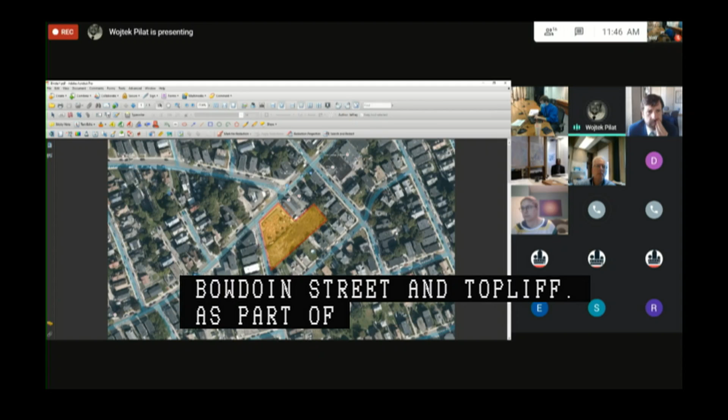As part of the 191-195 Bowdoin Street Viet-AID Housing project, Viet-AID is proposing an approximately 12,680 square foot, 4-story building to contain residential units on floors 2 to 4, totaling approximately 16 bedrooms. The project's proposed work in the right-of-way includes replacement of 171 linear feet of concrete sidewalk on Topliff Street and approximately 122 linear feet of concrete sidewalk on Bowdoin Street, installation of 2 new trees on Bowdoin Street with ground cover, benches, and bike racks.

The plan includes new construction of a 15-foot wide driveway curb cut to a lower level parking area on Topliff Street, the closing of existing driveway curb cuts on Topliff and reconstructing the sidewalk to meet Boston standard. Vehicular access will be available to the building's garage and parking via the new curb cut on Topliff, as well as a modified curb cut on Bowdoin Street, expanding the existing curb cut to 24 feet.

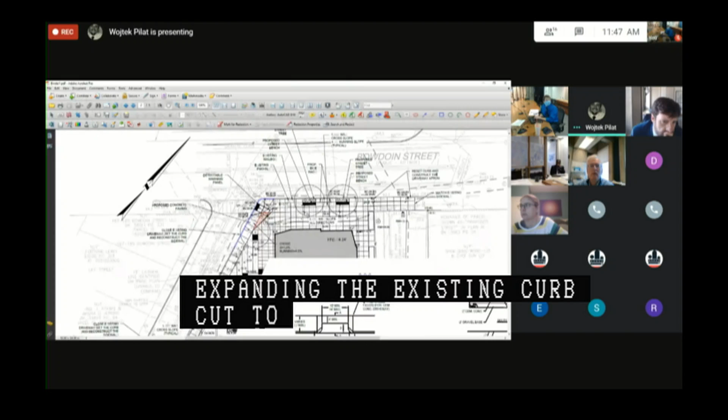The project is proposing the resetting of granite curb and replacement of concrete sidewalks along Bowdoin Street and Topliff in accordance with Americans with Disabilities Act and City of Boston standards. The paving design continues the frontage zone and sidewalk adjacent to the north and west of the site. The sidewalk will be concrete, finished to meet city standard. On Topliff, the concrete sidewalk ranges from 6 to 6.5 feet wide, and approximately 10 feet on Bowdoin Street.

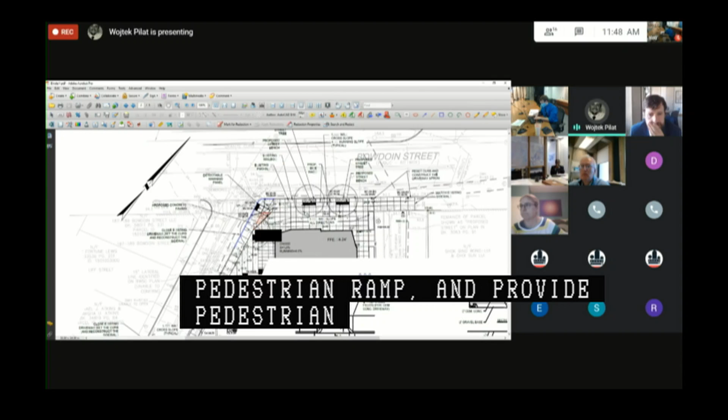We have reset the existing pedestrian ramp to align more with the crosswalk at the corner of Topliff and Bowdoin Street. The reciprocal ramp we found is ADA compliant. Due to the location of the pedestrian ramp and to provide pedestrian access, we are proposing an easement across the property. We'll show that on the plan.

These are some of the details of the street benching, ground cover, street trees, and bike racks for the area on Bowdoin Street. And this is the proposed easement for the realigned pedestrian ramp at the corner.

Any questions? For the, you're also adding a pair of benches in front of the tree pits, is that right? Let's see. The benches are correct. And will those be incorporated into an LMI?

I will have to defer to the landscape architect. Is Lisa on the line? If not, we can just work through that between now and the public hearing. Yes, I can check that, look into that. Awesome, Jeffrey, thank you.

Sorry, Chief. Yes, these improvements will be covered by an LMI. Chung has actually requested that the project's attorney reach out to him to begin drafting that document. Thank you, Tom. So Jeff, just let me know who the attorney is and I'll connect you. Will do. Thank you. Any other questions or comments?

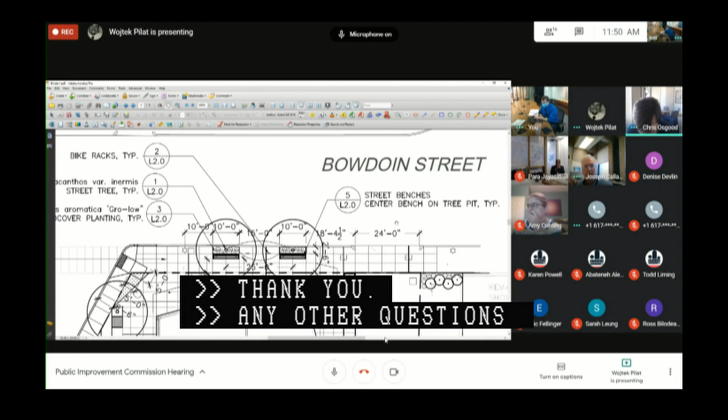I guess Todd or Robbie? Yes, we're all set, other than that. Okay, any members of the public? I see none. All right, Jeffrey, between now and the public hearing, just coordinate or have the attorney coordinate with Chong Liu, that'd be great. And is 2 weeks enough time? That's good for us. Great, we'll see you in 2 weeks. Thank you so much.

Our final item of new business is 25 Amory Street Connector, Center Street, Roxbury, grant of location on a petition by Verizon New England Inc.

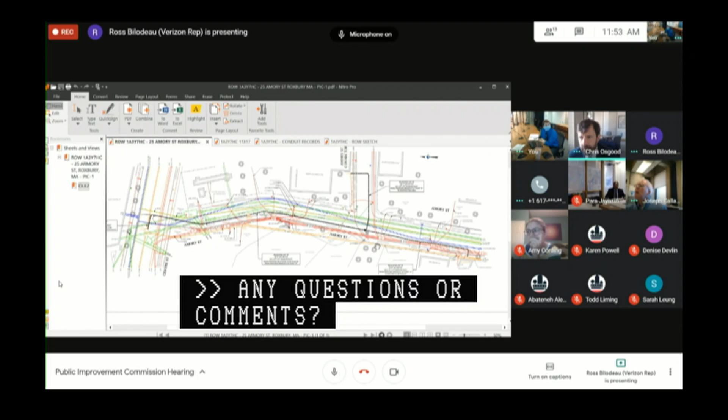Any questions or comments on this? Todd, have Ross coordinated this effort with Zach, because the abutters are expecting someone to clean Amory Street. I want to make sure that the infusion of these conduits are not going to impact or compromise our ability, or someone's ability, to rebuild Amory Street. Yes, we'll put Verizon in touch with Zach, and also the 25 Amory project.

Yeah, sure. Also the interaction point between Amory and Center Street—I don't recall exactly what the geometry looks like in that area. Okay, so make sure some thought is given to how the new conduits are going to come off Center Street onto Amory Street. Yeah, that connection is kind of—I wouldn't say a mystery, but it's an interesting ownership situation through there. Right, okay, so this needs to be thought through a little bit carefully, and I'm sure the team can do it. That's all, thanks.

Awesome, Para, thank you for raising that. Other questions or comments? Todd or Robbie? We're all set with this. Any members of the public? I see none. Okay, Ross, does 2 weeks work for you? Yes, it does. Great, all right, we'll see you back here in 2 weeks. Thank you very much.